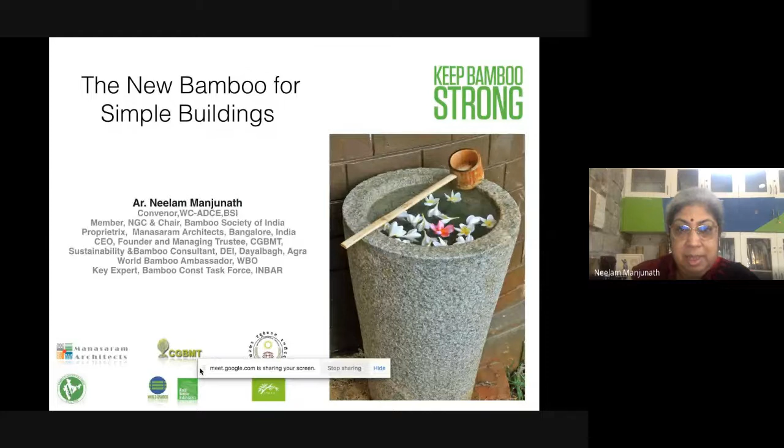This is the new bamboo I'm writing, because we are not doing anything new in bamboo, but we actually should have been calling it the renewed bamboo for that matter. And simple buildings—I think I will come to why I'm calling it a simple building actually.

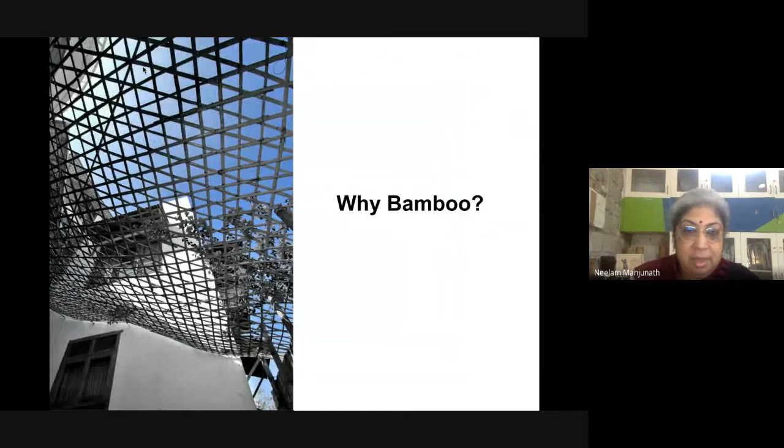There are some issues—this is actually part of a survey which I will also share later, which we did in 2018-19, a global survey on this problem as to why it is not getting mainstream. And I had presented a paper on the same thing in 2015 at the World Bamboo Congress in South Korea, in Damyang.

So what we found was that everyone talks about bamboo being one of the eco-friendly materials, that's why we should be using it, and that's why we are doing all the research. And the researchers also have done a lot of research—actually it has happened. But when it comes to actual applications in the field, there's a lot of gap between what is all the research that has been done and the practical applications and testing of it in the field. That is also a big gap.

That is one thing. For me, bamboo presented a case because one-fifth of the world population lives in bamboo houses even today, even without much intervention reaching the sector. And about approximately one-third of the world lives in mud houses. These are two materials which are available almost everywhere—not everywhere, I would say, in the tropics where bamboo is actually found and grows very well.

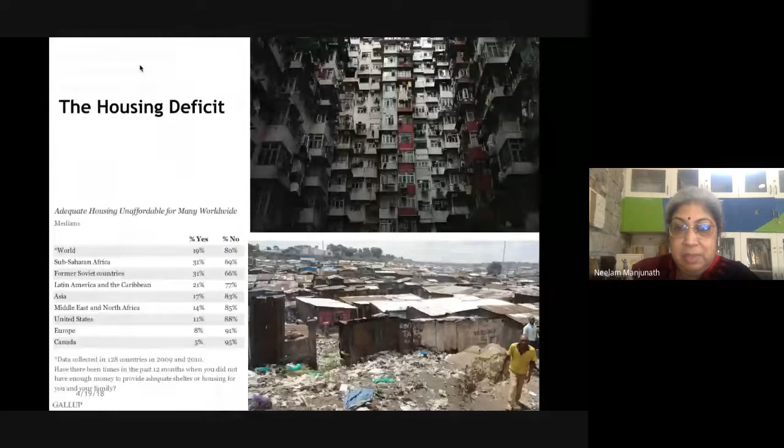That was one. And then, of course, the global warming that we have, because of which in the last 2 years the whole world has literally come to a grinding halt. But the two connections are something which is missed most of the times, and that is why most of the mainstreaming of bamboo, which organizations like CBRI and architects across the world, including me, and many others are trying to do, is not really having a lot of effect.

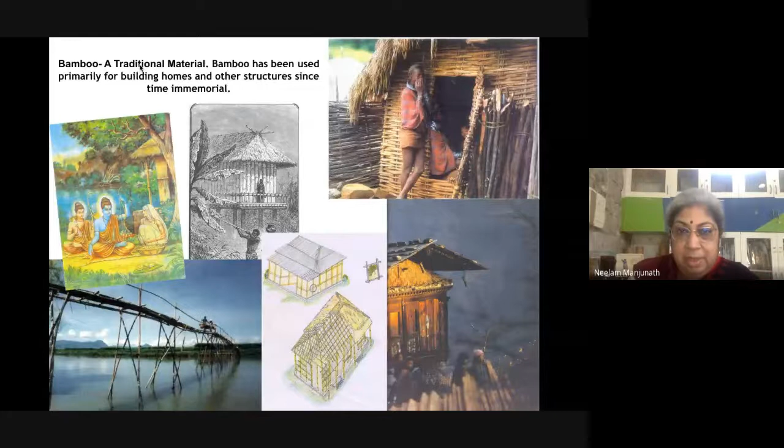For me, also, it was because I do believe that building systems take a lot of time to actually crystallize and also get accepted by people. So bamboo being a traditional material, and at the same time, we also have a lot of people who have been working on bamboo since time immemorial, and they have that in their DNA, in their genes, because they know how to work with bamboo. We really don't need to do too much effort in trying to get the execution people slightly trained or tweaked to do the new kind of systems that we are trying to implement.

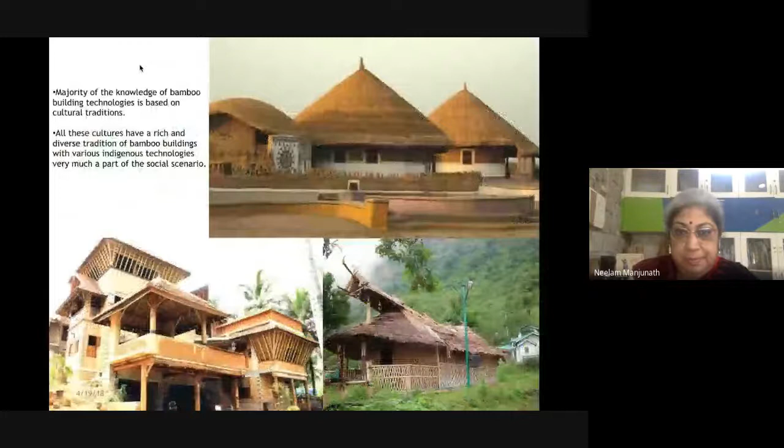I wouldn't say again new, and I wouldn't say new—I would say renewed, or revisited and then improved upon from the traditional systems, which have come down the line from when there was not much communication and transportation, so people had local materials to work with, so they bettered it in the best way possible to work with it and live comfortably at the same time.

These systems we see are absolutely like natural materials. You can't have one system developed somewhere and say that one solution fits all. The global warming issue is partly because we think just like steel and concrete, which are manufactured in one factory and then behave the same way across the world. Even when completely processed in a factory, concrete, cement, and steel can behave very differently depending on climate conditions.

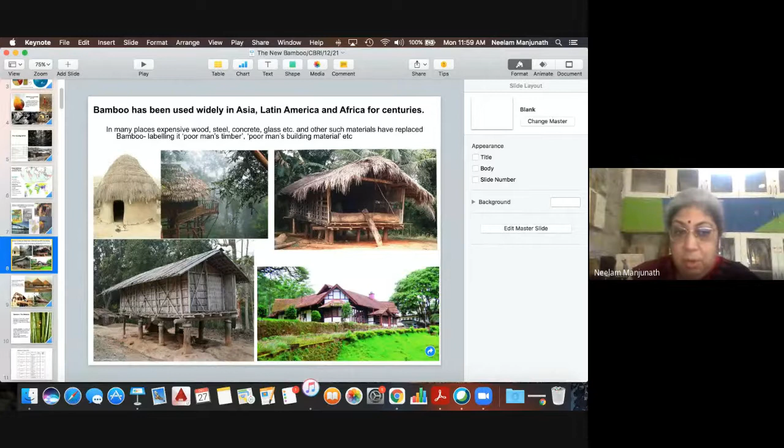So when we talk about natural building materials, it's even more important to go for localized solutions for different climate zones. That's another factor to keep in mind when working with bamboo, especially during research, since different climatic zones will have different effects on all this. That needs to be taken care of.

In our country, all-bamboo buildings are not common in most parts, even across the world. There are very few places where all-bamboo buildings are built and people live in them - more like the northeast, and some parts of Kerala in our case. But in most places, it's a composite material, combined with other building materials as a palette.

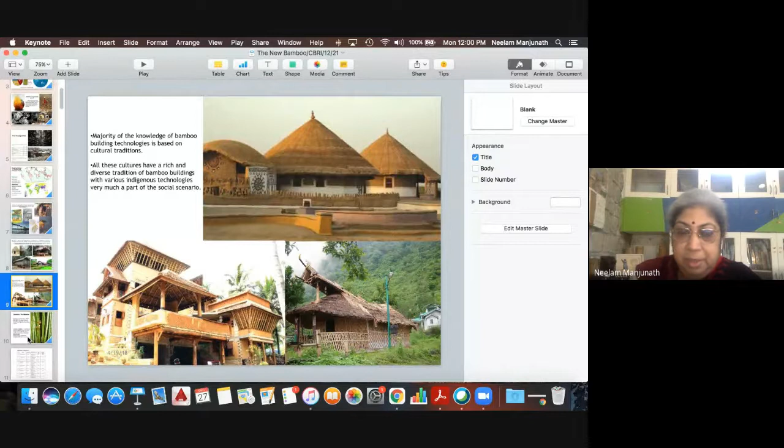The previous presentation was also trying to say that it looks more solid, so people will accept it more because it will last much longer. If it's only bamboo, it won't look very permanent, it won't look pakka, it will look like a kacha house. That's something we need to look at, which is why there's interest in how we're supposed to do research to connect the dots - how the gap between demand and supply needs to be bridged. That's the research question we should also be asking.

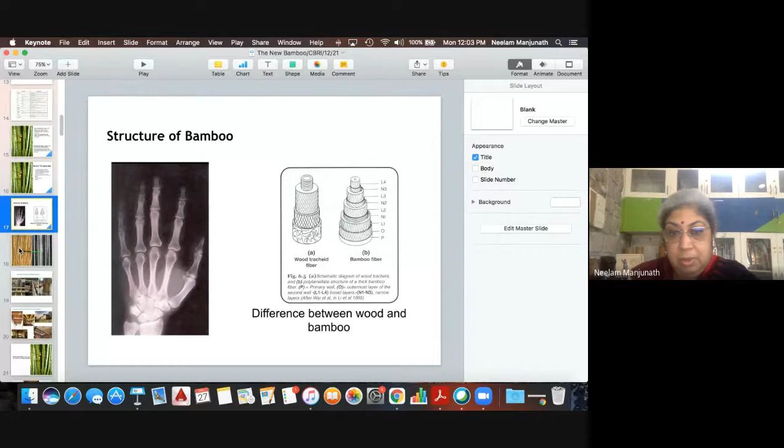And I think you people know better than me that if any natural material can replace steel, it is bamboo. Of course, a lot of research needs to be done, but also a lot of research has already been done, and people have been trying to use this.

These are some recent photographs, but I know people, from Bihar and many other places, where bamboo has been used for almost 60-70 years, used as reinforcement in the slabs.

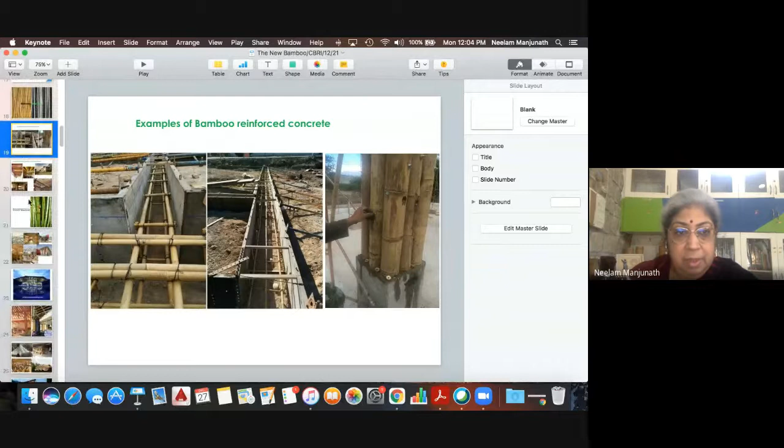50, 60 years is a good enough lifespan, because as we are aware, concrete, depending on the kind of application and the kind of concrete used, has a lifespan of between 40 to 70 years, if I'm not wrong. So if with bamboo reinforcement we can get a life of about 50 to 60 years, I think it's a good enough proposition to use it quite widely.

These are some of the multi-storied buildings done by Didi Contractor in Himachal Pradesh. And this is almost like a 200-year-old building in Bangalore with a limestone slab on it, and this bamboo has not been changed in all these years.

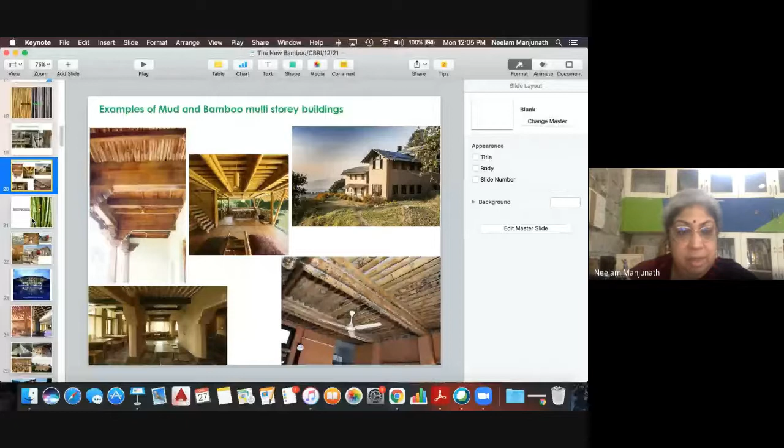As you can see, it's quite difficult to change. This house is actually in working condition, and we have a lot of film shootings which happen here.

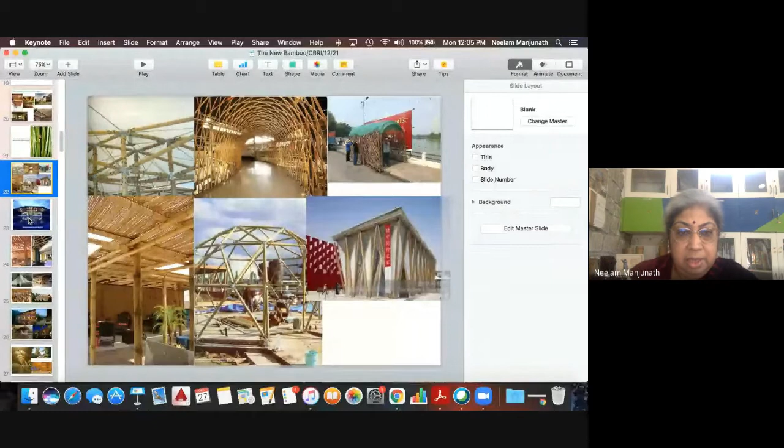I'll quickly run through different kinds of work happening across the world, in different kinds of structural systems. Depending on, I would rather emphasize, because of the platform we're speaking on, we are looking at the engineering aspect of bamboo as to how to really diversify and have bamboo perform.

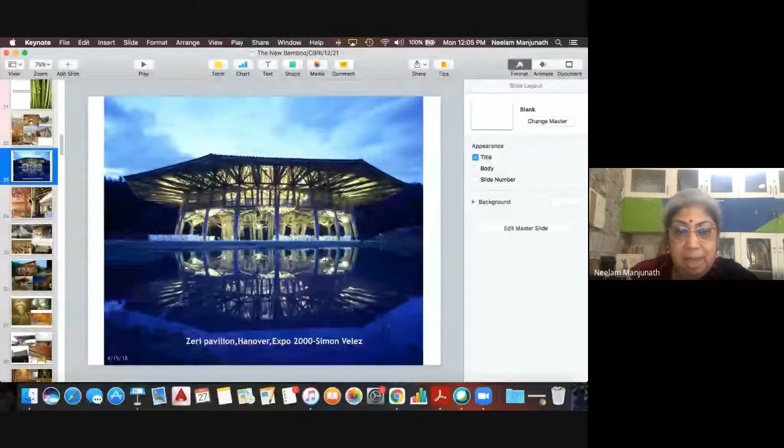Buildings for different applications, not just for some niche market, because that is not going to solve the problem. As we are talking about, bamboo, a grass, can save the world - you would have heard about the TED talk. The grass can save the world only when we use it appropriately, and not otherwise.

I'm really sorry to speak this way, but there is this kind of Bali syndrome, and I'm really quite allergic to it, actually. There is something about using it for fashion, using it for those kinds of things, and that gives people a different kind of impression - it's very nice to do one building like that.

But I don't know how many people - and I have spoken to several people, and I'm trying to put this in front of everybody - this is an excellent building, the Arc, which has been recently completed in Bali, in the Green School. But I don't know how many people actually know the cost of that building.

This is something between 20,000 to 25,000 rupees a square feet. And I would really like to ask this question, whether it is really justified if we are trying to promote it. Because in the media, you don't see the small ones, like what CBRI Roorkee scientist Akash was trying to show. These things don't go in the media because they don't find it very appealing or something like that.

But I don't know how to really go about that, but I think that really needs - you have to call a spade a spade. Yes, you do that kind of building, but you don't say, when you're doing that building, that this kind of building will save the world. They definitely will not.

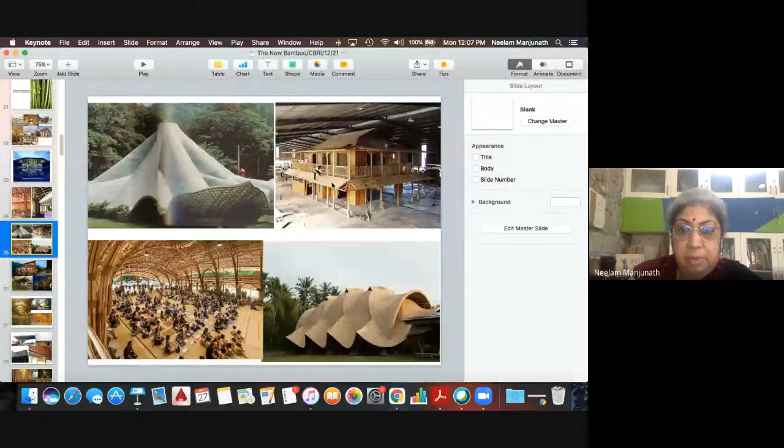They have been doing prefabricated building for more than 20, 25, 30 years, and very good practical buildings they have been building across. And then, of course, this is our Bangalore International Airport Terminal 2. These people, SOM New York, are the architects of the project.

In 2017, they came to us and for about 2-3 months we exchanged information because they had to convince the client. They didn't tell me it was for an airport - they told me it was a transportation hub they were trying to do, and for that they needed information.

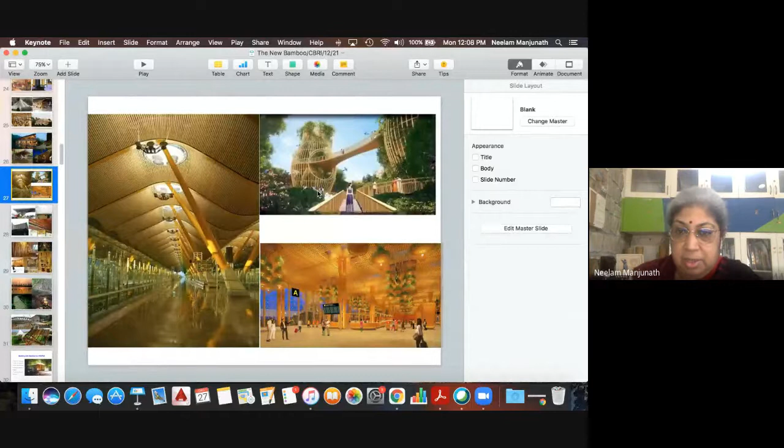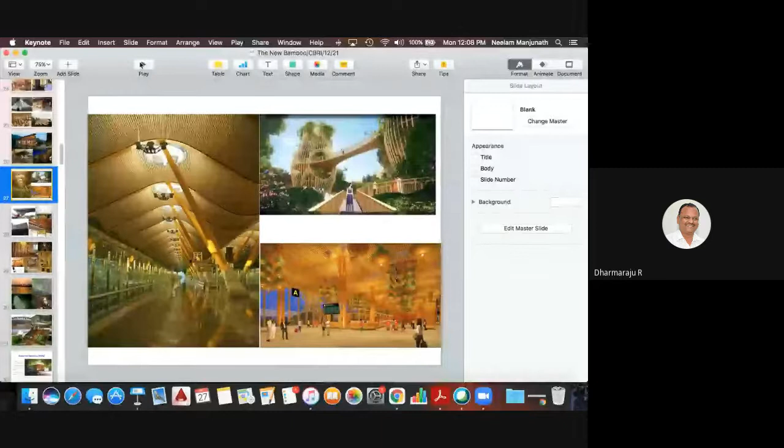So once we were done with everything and they got all the data, after that we never heard from them for a long time.

The next time I met them was in Beijing for the BARC conference in June 2018. They said they were the Dasso company, and that they were doing a project in Bangalore. I said, okay, which one? They said the airport is being done by us. I asked who the architect was, and they said SOM. So these people had never gotten back to me.

After we give you the knowledge, you do these things, and after that you never get back to us. What has happened is all these things have been outsourced outside the country. So inside the country, none of the structural engineers, architects, or suppliers of bamboo actually benefited from this huge construction happening in our country.

On the left side, that's Richard Rogers - he has done an airport in Madrid where this was used. And the second airport in the world is now using bamboo too.

There's a disturbance. Yeah.

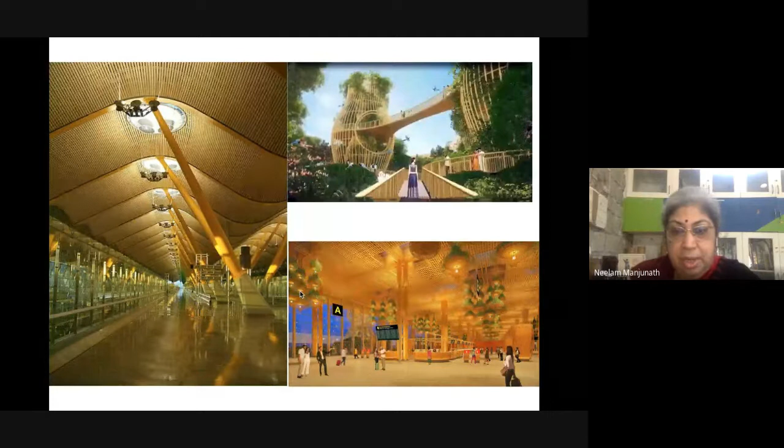But we from India - all the structural engineers, all the organizations, all the institutions - don't get to participate in it, and that's really not very fair.

These are some of the other applications we see in bamboo here. I think this bamboo roofing sheet is one of the best examples of how good we are at doing research, and we can produce products which are really very good. But other than one company, which is also struggling with a lot of difficulty,

Just a moment. Tell them to stop.

They are struggling with a lot of difficulty, and they are not even able to supply. I have not gotten a supply of these roofing sheets, which I've been trying to promote for several years, almost the last 10 years. So that, I think, is a difficult thing going forward.

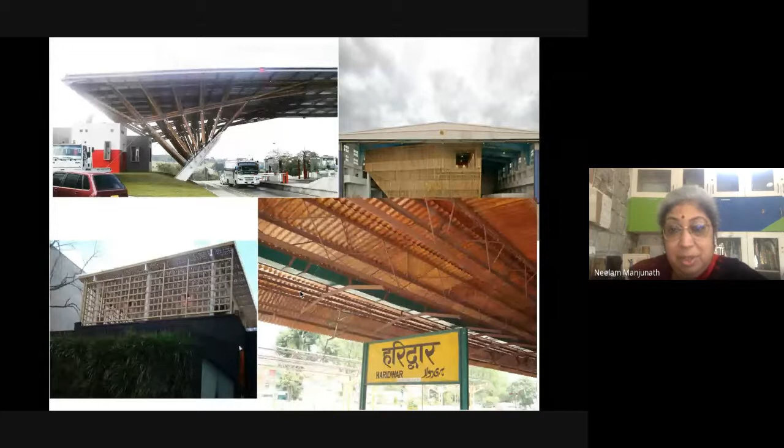These are some interior products which we use. Also the bridge - we know bamboo can be used for bridges, and we really need to take this to the fullest to see it applied properly to small bridges. I'm not talking about long, 1 kilometer vehicular bridges done in steel that should be done in bamboo. But where bamboo needs to be used, it can be used, it should be used, and I think it can take a lot of application.

There are some things again with this bridge - you need to cover the bridge. You can't have an open bridge when you have to have permanent bridges. I will come to that much later.

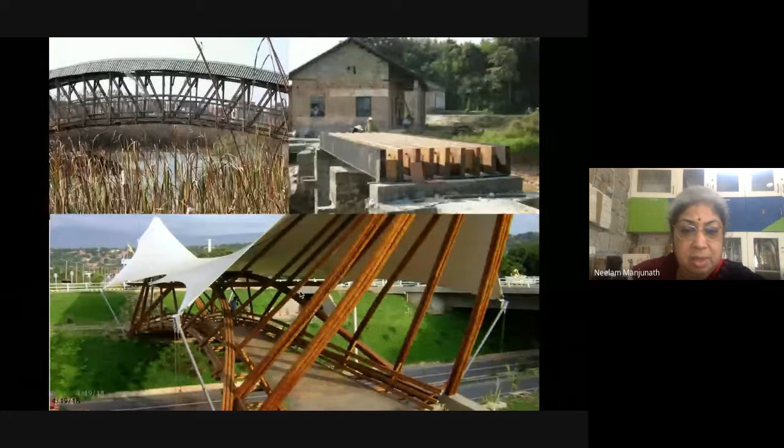These are some of the bridges. The right one is from China. The left top one is by us, and the bottom one is by Jörg Stamm, I think, and our architect Simon Velez - this is in South America. I think we really need to use that.

With this, I'll come to some of our works which we have been trying to do for all these years. What I feel, as I said earlier, is I like to build with bamboo for people, and that has been my aim so far.

If you say 1/5 of the world lives in bamboo houses, and we are able to infuse some kind of technological and scientific input to make that life better - can you imagine 1/5 of the world's population's housing becoming better if they are working with bamboo? What kind of problem would we have solved? This might be a ballpark figure, but between 1/3 mud housing and 1/5 bamboo housing, I think it's a good approximation.

If we can really get inroads through our technology and persuasion for people to use bamboo for their building... As the previous presenter was speaking, I also feel that all-bamboo buildings are not actually the solution to take building forward for people, because it's difficult for them to maintain. There are lots of problems in that. So only in areas where all-bamboo buildings were done traditionally and it suits the climate, we should be doing that. Otherwise, we should go for more aesthetically simple buildings built for people for daily usage and various purposes.

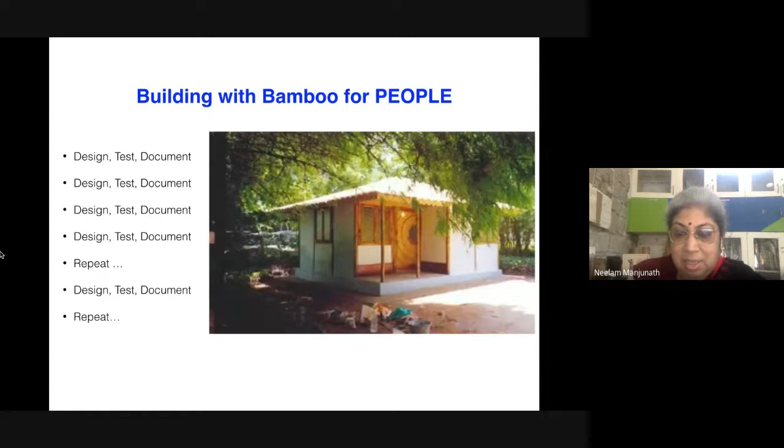My period, I'll take it into just a five year period. We started this journey with the Raj Bhavan. I've already shown these earlier so I won't waste much time on it, but this was the beginning for me of learning bamboo. We were on site for 24 days, literally experimenting, and really excited.

We had a structural engineer with his masters in structure from IIT, and we had a lot of good time with different kinds of systems in bamboo construction. This was like a lab, we really worked, and we were given quite a free hand to work on it. This went on to the second one, and this house is still there in IPIRTI, being used as a club, and anyone can visit it.

Here we did one more, and every step I tried to move forward was trying to put a new structural system in place. Of course I was looking at aesthetics and the architectural part, because that's what gets acceptability for the house. At the same time, I was also trying to evolve the structural systems at IPIRTI Plywood Institute, which is my alma mater for working with bamboo. We had Arun Kumar Bansalji, who was the director, he's retired now, and I have a lot of respect and gratitude to him for introducing me to this.

This was a pyramidal roof with two bamboos with a flange, a distance between the two, that's how I used it. There was no in-between support, I just knocked the support down, and instead of single bamboo, I used double bamboo. It's more like a bamboo truss, the beam that was there, and that's how we did it. It was tested by Dr. Jagdish out there, and this is still standing quite well, with a traditional construction system of Karnataka houses, which has a clerestory in each house.

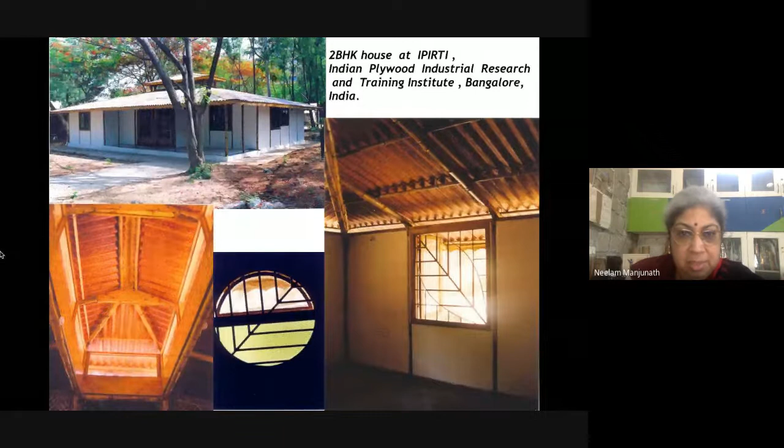So it was like combining traditional architecture and traditional materials, while still evolving the structural system at the same time. That is how most of my projects went, I kept raising the bar for myself.

This was a prefab house we did in 2004 in Bangalore, and then it was shipped to Italy. We did not go there because the project cost was so small that the client could not afford to pay for our ticket and stay. But we made it literally like an IKEA house, and the client was very happy. We still visit him and keep in touch, and it has been working very well out there.

We also try to use it knowing that bamboo grows more in disaster-prone areas, and more disasters happen in tropical and subtropical parts of the world where bamboo is actually known to people. So this was one solution we gave to Seeds India for the tsunami that happened, the Great Tsunami, in December 2004.

The high point again was that we did not want to build it for people. We actually wanted to teach them how to build, so that there's a livelihood option created for them, to take it forward. This was done by them, except we went at least 2 to 3 times, and we had an engineer from Seeds India.

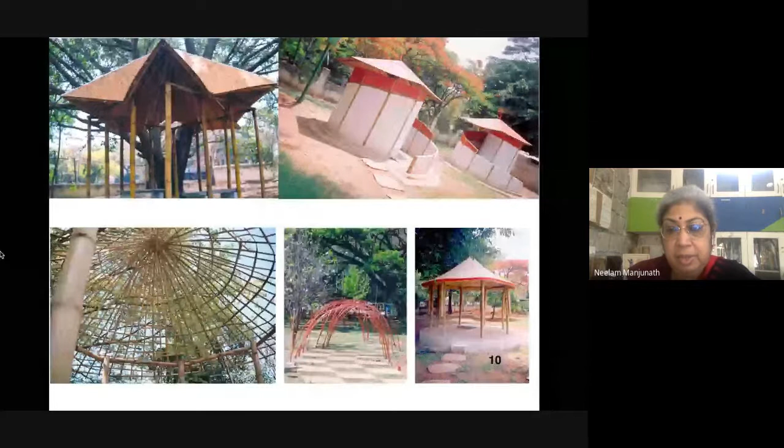This, if you see the bottom right, was my first experiment with bamboo reinforced concrete, or I should say bamboo fiber concrete. That was my first experiment, which I did in 2005. Unfortunately, after 10 years it did not work well, and they took all these structures out for, according to them, something more permanent.

This is around the time the World Bamboo Congress was held in Delhi in 2004, and the Delhi Development Authority invited us to do this project where we did a bridge. It's still there, slightly tilted, but still 80% of the bamboo remains proper.

They invited us again just before COVID happened, and we had an inspection after that, but then COVID happened, so we could not take it up.

And we are hoping that we will be able to either repair the bridge or redo the bridge. So it's been about 15 years now, and they hardly had any maintenance done.

The one point I want to make here in this photograph is that you have to cover the bamboo bridge. Bamboo needs a boot, because it's hygroscopic. It also needs a hat, so that it is covered from the elements, and that will really enhance the durability of bamboo manyfold.

So we don't need to try to say even steel, if you don't cover it, it cannot actually be protected with paint and other things. Even steel, if you leave it outside, in 7 months it will start corroding. So you don't need to be brave and expose your bamboo completely. It will not work. You'll have yearly maintenance and lots of problems that come with bamboo, and that should not be encouraged in the name of fashion or show.

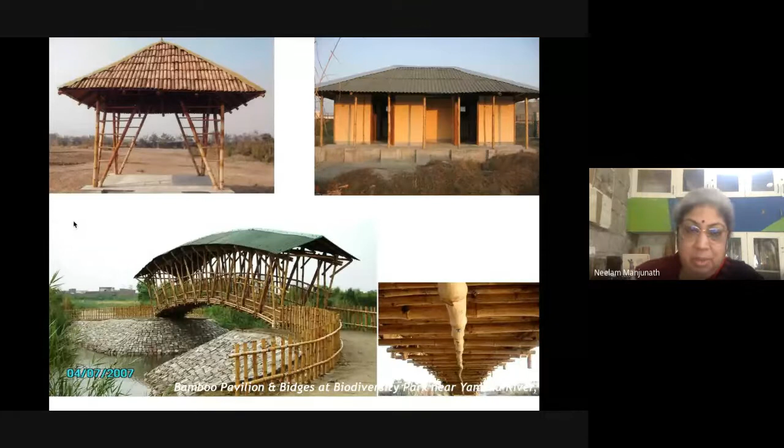This was something done without any nails. We have done the roof, and there was a different kind of treatment system. We actually boiled these tiles in creosote oil to make it completely weatherproof. They are even now, though battered, in quite a good condition considering 15 years of non-maintenance.

It is quite good. Around that time, I also started working on shells, which I'm really fascinated by, because bamboo being a very light material can really be used because of the weaving. When we weave bamboo into a basket or something similar, it can really take a lot of load once it's been woven into a particular form. With that principle in mind, I started putting it into my buildings, starting from small scale.

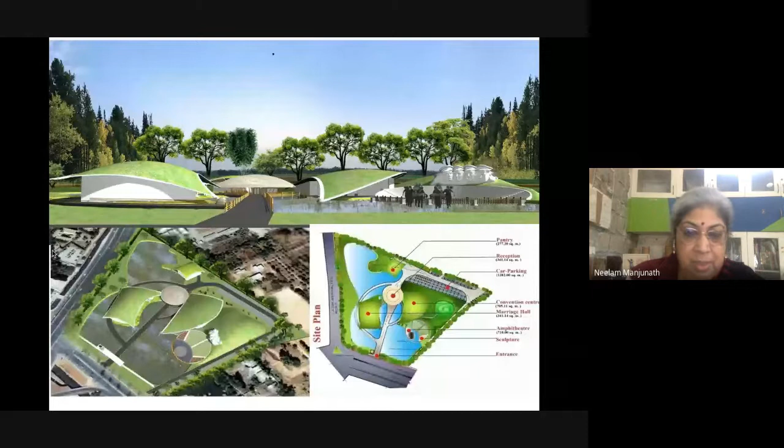If you see, we have even bigger conference halls in that design, and community halls that I've done much bigger with a green roof design. This is very much workable, and we would like to work with research organizations and people to really take these kinds of designs forward.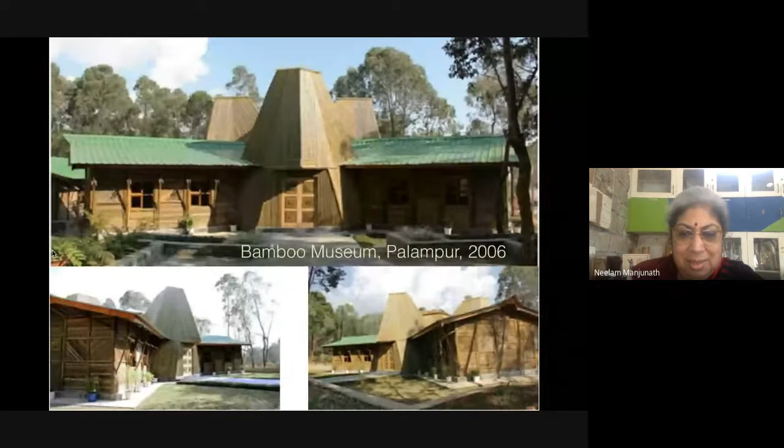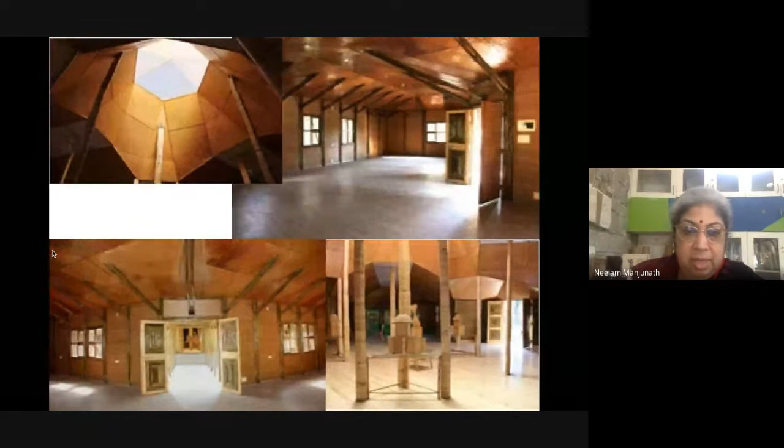This is in Palampur, very close to CBRI Roorkee, done in 2006, and still going very well. These are the interiors, a combination of round bamboo and also processed bamboo, like bamboo sheets and BMB boards. I think it works very well. This is a museum and very much in use at the moment.

In 2008, I started my own house, where I started thinking about combining bamboo with mud instead of cement. When I was doing the cement plastering to bamboo-crete walls in my projects, I started thinking about mudcrete to be done with the bamboo walls. So this was one project, since this was my own house.

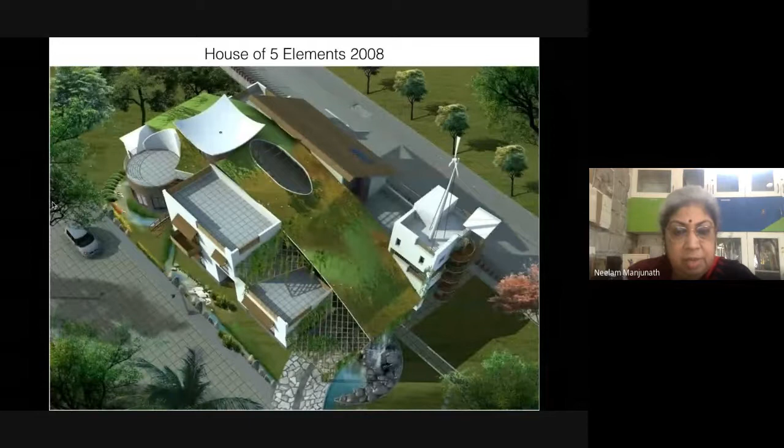Even with mud, I did a lot of experiments, almost 30-40 experiments, testing and working with different scientists and engineers to really work this over. The high point of this was the roof we've done, that 4,000 square foot roof you see there, a 175-feet-long curved beam with three round bamboos that we put there, and a very steep slope.

If you see the slope here, we had to employ a different kind of viscosity of the concrete we were using, and we had several meetings with the RMC company, who cooperated very well. We had a very good time doing this project with them.

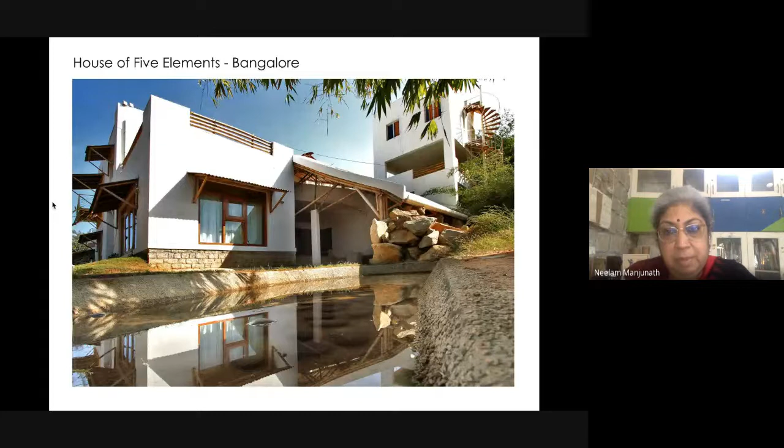All this is mud. Mud and bamboo, these are two materials. When you tell people you'll make their house with mud and bamboo, they immediately think about a shack. I wanted to change that thinking, that mud and bamboo needs to look like a shack. So this is the house I have done, almost 5,000 square feet footprint, including the basement from where I took the mud out and stabilized mud blocks with bamboo.

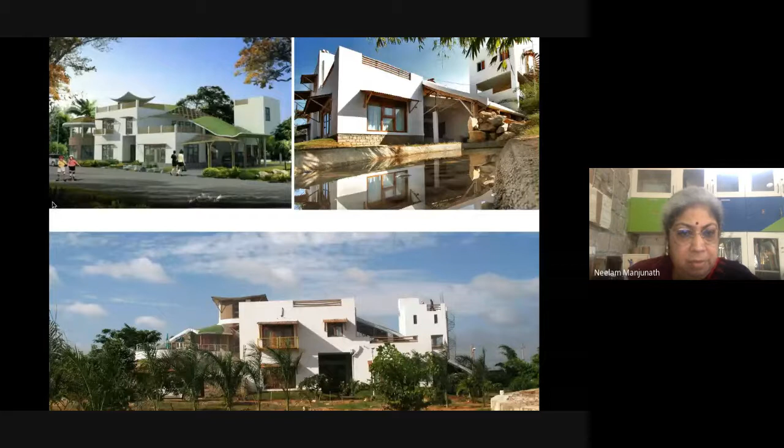Even the bamboo-crete walls have stabilized mud plaster instead of cement plaster in this case, and that's what we used. Here are different photographs of the house. Even for smaller things like the pergola, I have used this material, bamboo. Even the roof at the top of the staircase is also bamboo-crete. And small things like small bridges, you can see here in the photograph on the right - there's a very flimsy bridge you can see.

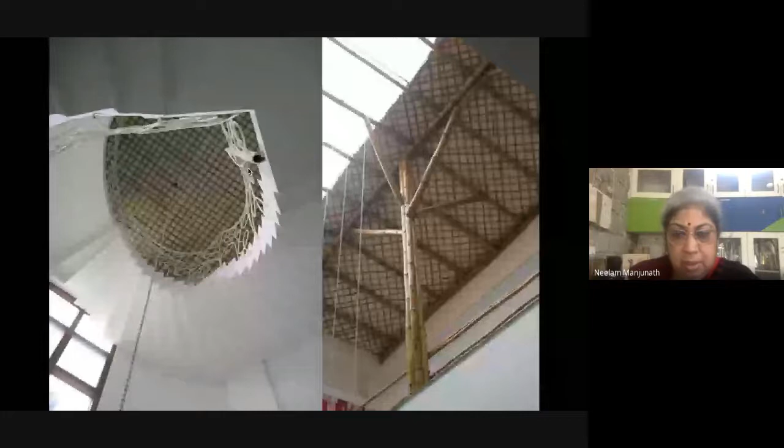A very slender column takes the load of that curved roof I talked about, and you can see a very slender beam as well - a very simple system of taking all the load of the structure down. If you see the edge of the roof on the wall, it is not actually on the wall. We have one bamboo that runs through, and the whole roof sits on that, not on the 9-inch mud block wall.

So this whole thing is taken by these slender bamboo columns, almost 18 feet tall, flooring, different kinds of systems used. And here you see that column with asymmetric loading, a 20 foot tall column, which transfers the whole load to one single bamboo taking it down to the earth. That is something I am also surprised at how it is doing it, and I would be really happy to see these things tested by research organizations to take this forward.

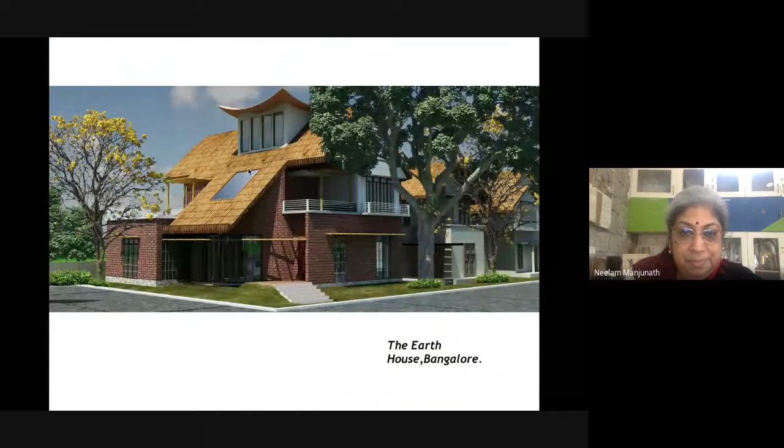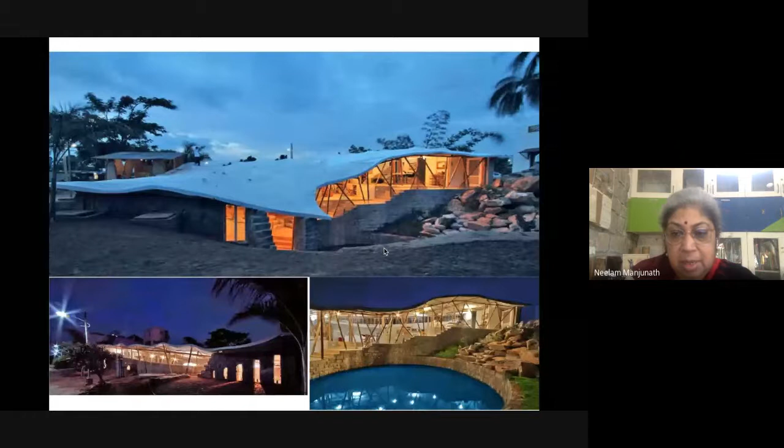This is the structural system in a fishing platform, where you have very slender single bamboos. We take a lot of load, so much fish has to be taken out from the sea and other things. Here it is almost like a 5-inch slab, and you have only one single bamboo, which you see on the right side and the bottom - a curved beam with joints, resting on these very slender leg-like columns. That's all the structure it has.

If you see the inside, this is the way it is, and it's got quite large spans of space. I have almost 15 feet clear spans, which generally you would get from a 9-inch column or something like that, as you can see here. This is the way the roof was done - it has bamboo split as reinforcement inside.

I also use bamboo fiber in the concrete itself to make it much lighter, and to reduce cracking by improving the bonding. This is not mudcrete, this is a proper concrete we have made, supposed to be around 2.5 inches, but somehow with plastering it has gone to almost 4.5 inches.

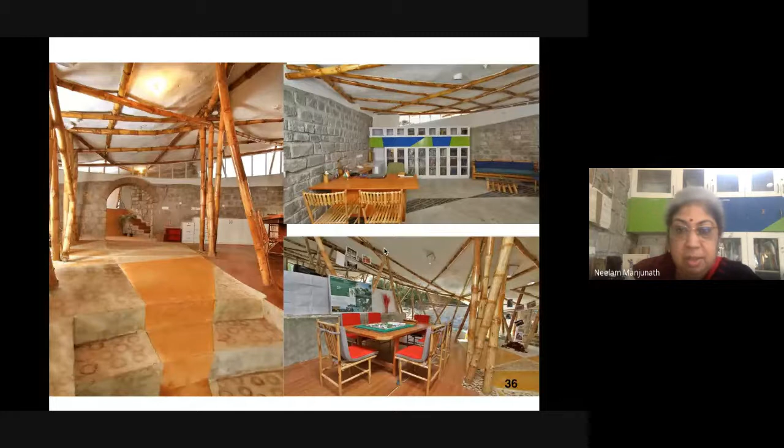All these things now, it's almost 10 to 11 years, and it's been working fine. Further, I moved to even bigger, bolder work than what I had been doing so far, and on site work that I could do. I really got very bold, and I proposed this to BMRCL.

They invited me to put forward a design for a metro station, not the whole metro, but the top structure of the metro station. This is completely a woven bamboo composite that I designed, and the whole structure works by virtue of its shape and the way the elements are connected to each other.

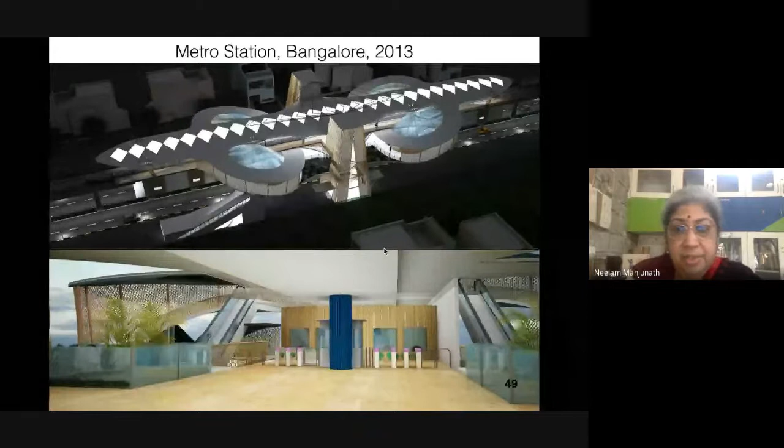The tensile members you see on top are kind of braided steel wire strings that we tried to use for this. There are other two options that we have given, but the government has taken a long time on this. I'm hoping that after the Bangalore airport is done, maybe one of these can finally come live, if not in Bangalore, then anywhere in the country, and we could do a good job with this.

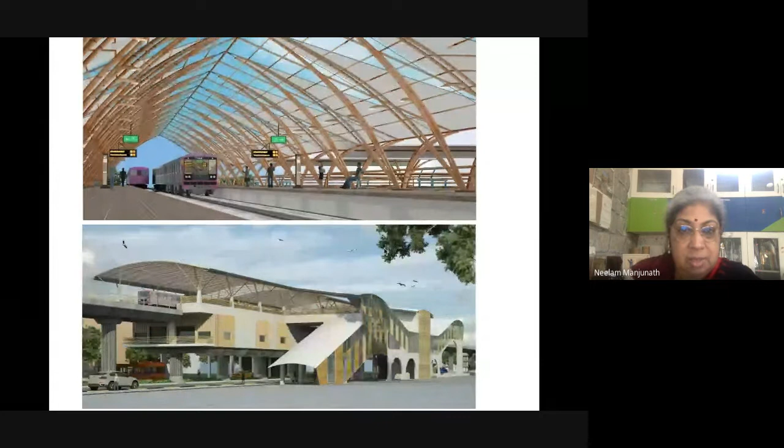I would also like to work with some research organizations on the structural part of it, to take it forward. There are some other projects where we have incorporated bamboo in a very different manner.

This one is in lime concrete, because it's in Hungary, where limestone is used in a lot of traditional buildings. I try to incorporate that with bamboo, always trying to stay local. They use bamboo for musical instruments in various ways, so there are a lot of musical walls that we created. It's not just a structure - it's also an element that takes the load.

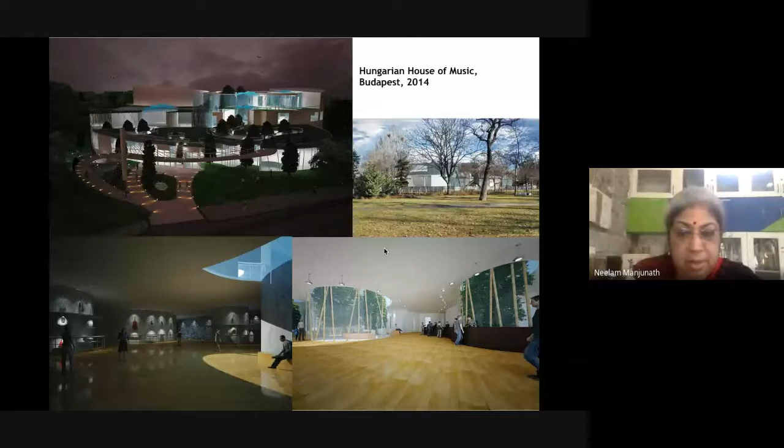It's structural and cultural, and you could say architectural and aesthetic aspects all coming together in one, but still done in a very responsible manner - giving proper support, proper fire protection, proper cover, and respecting how bamboo should actually be used, not trying to be overly brave with things.

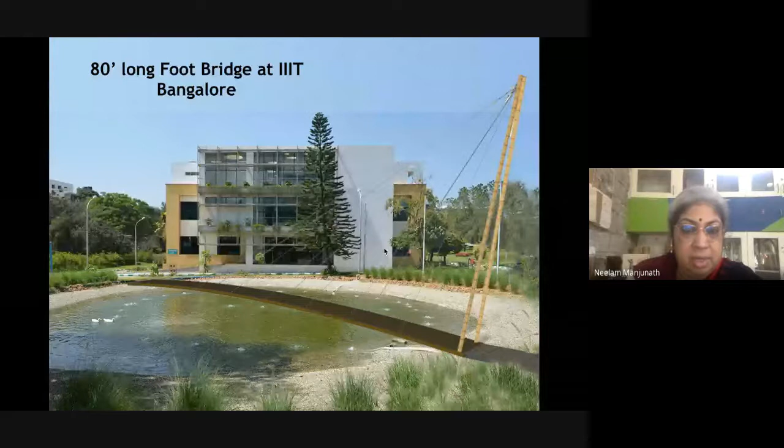This was a temporary bamboo bridge that was requested, but it was never actually done. It was around an 80 foot long bridge for 13 lakhs. I was told that if it was steel, it would have been fine, but for bamboo they felt they couldn't really spend that kind of money, so it did not take place.

Further, we have tried to move on to projects where bamboo becomes part of an overall project, like a housing scheme. Here we have a housing project that is almost 60-70% complete. Some villas are complete, and this apartment is almost complete, to be handed over in another month. Once it's complete, I'll share more pictures later. But the bamboo elements are still to come - they're not visible yet, so I have not put pictures here.

This community center, which you see on the right side, is made of rammed earth and bamboo construction, and we are hoping to start that soon as well.

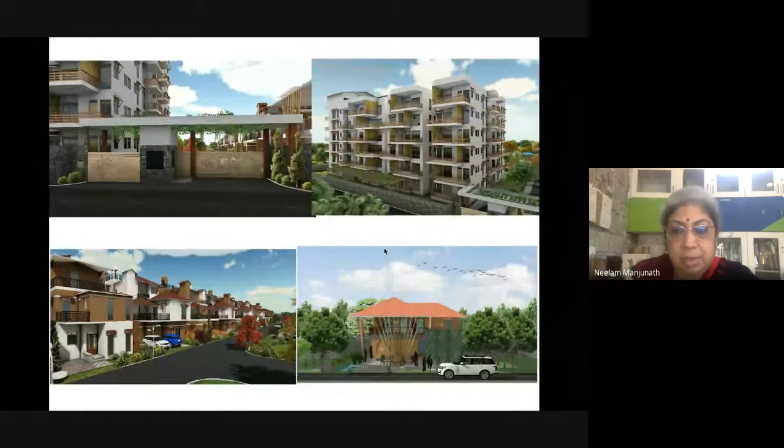There's another large project we got, in Tirupati, Avilala ecological park, which we got through tender - an interpretation center. What you see is a 30,000 square foot structure, a composite structure, because we were not allowed to use cement, concrete, or steel here due to the nature of the project. So we were invited to design for it.

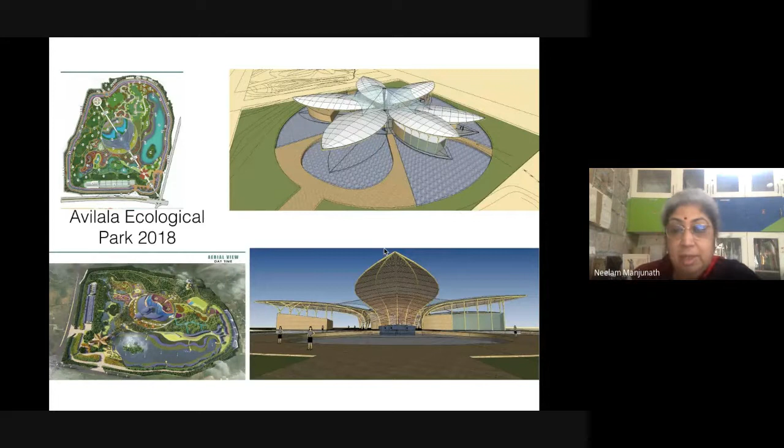As you can see here, we have used tensile braided steel to hold together all these leaves of a shell structure. All these shells are very ambitious work for us - 30,000 square feet, if it gets built. It's still going very slow because the project started and then we were hit first by elections and then COVID for the last 2 years, and it's going extremely slowly. With Chandrababu Naidu no longer in power, I think it has gone into some kind of a slow phase right now.

We are hoping that it will. This also had a 150 feet tall watchtower, and also a skywalk which was around 1.7 kilometers. So these two, if it would have been built, would have been the highest and the longest in the world.

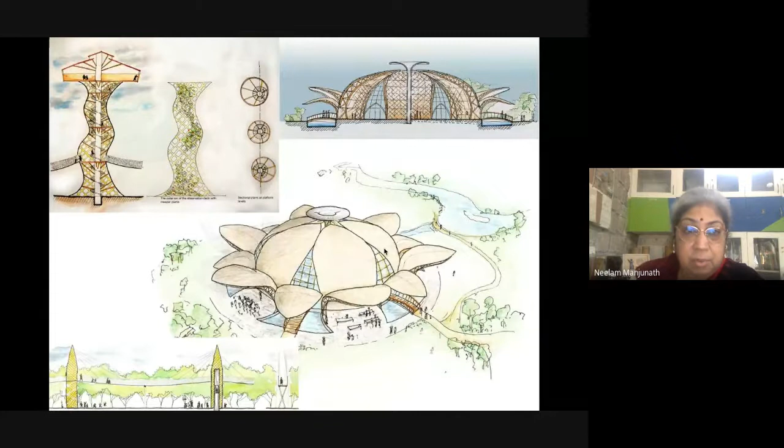If it is constructed. We also participated in an international competition, and this is actually a live project in Bangalore for slum development. The authorities are giving slum people almost pigeonhole 250, 300 square feet apartments on the 13th, 14th floor, which people don't find comfortable, because the way they live is very different. So they really feel very uncomfortable about this.

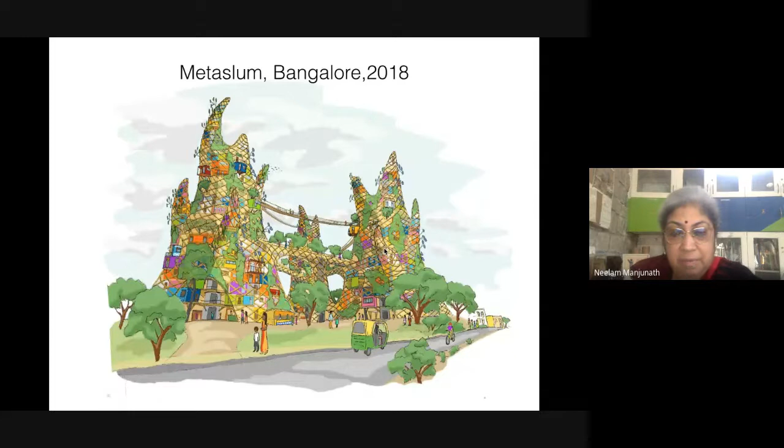So this was one solution we tried to give: you have an inside core with concrete and steel, with a lift and staircase and all that. And then the other parts, like the external floor beams and things like that, can be done with materials these people are more familiar with back in their villages or urban areas.

This can be a small unit, just like we do the Ashraya house. We give the basic house, and then people build on it as the family grows, as per their financial means. Today he might only afford 250 square feet, but as he grows he may afford more, and can extend his house. So giving that kind of incremental housing in a slum development program was the idea here.

And also with this, we have tried to give a bamboo skin, which is like a mesh, and these can be replaced. This is also for a safety measure, so the building has complete safety from all sides, and inside that all this development can actually happen.

But this net was also supposed to have areas where you grow plants, like in villages you put a bamboo pergola and grow vegetables. There could be just one or two plants of gourd or something that runs through the whole season for vegetables for them. That was something we wanted to do.

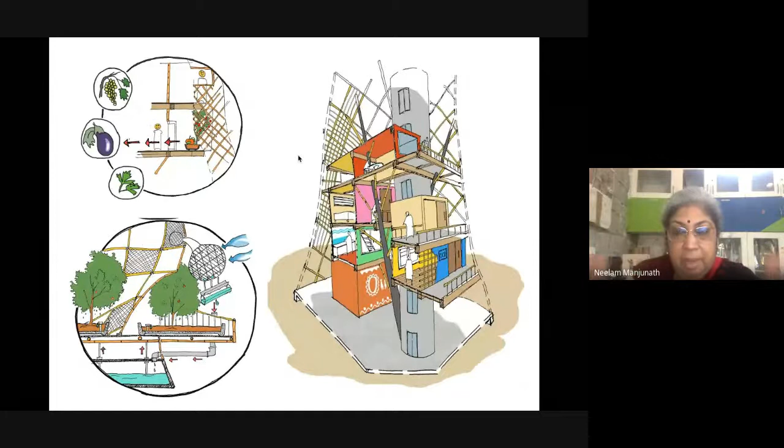Bamboo is not just alone, like sticking out as bamboo and trying to carve and say, 'I am bamboo, I am a bamboo building.' Instead, we try to incorporate it into different kinds of systems.

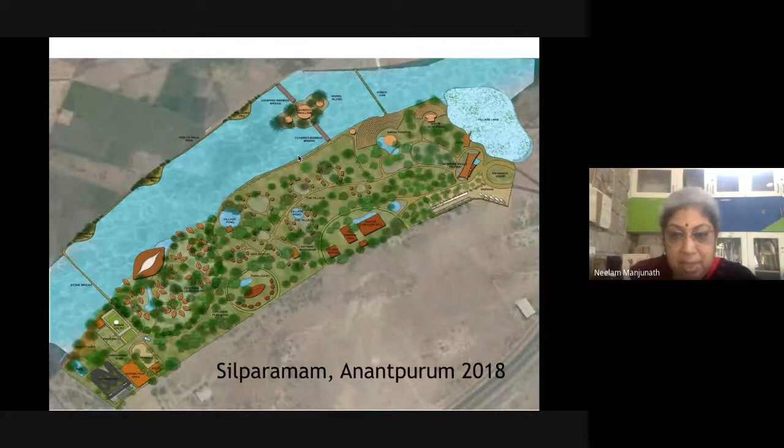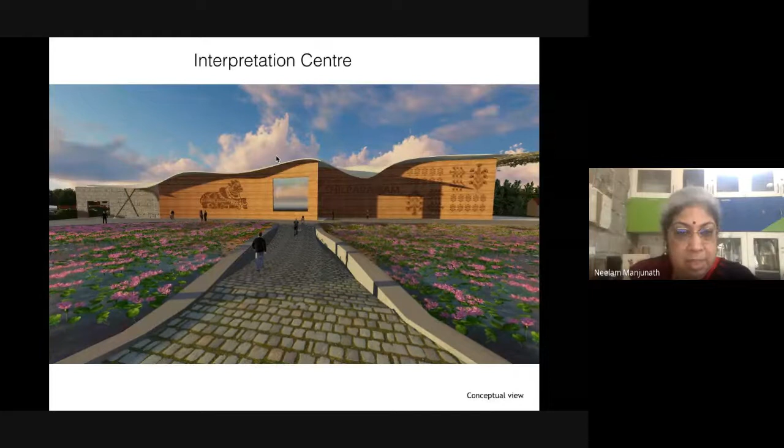This was another big project that we got through a tender, and it is again going very slow after the elections. But this is also a very ambitious project for us: a 20,000 square foot bamboo mudcrete shell roof on rammed earth construction, and various other such structures we have tried to do, as per the craft systems of the Silparamam.

This is a Silparamam project, so it's not that you put all the handicrafts in itself. The craft of making buildings - people think craft is separate from engineering, but we actually have to incorporate the two and bring them together. That's what we have tried to do in this particular project.

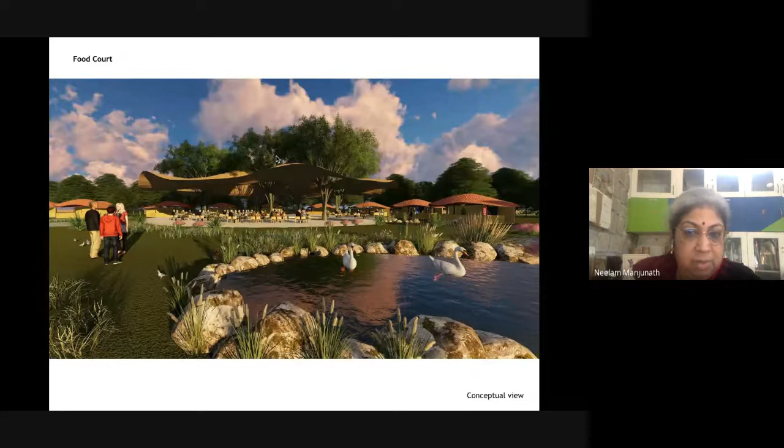We were invited as one of 5 people from across the world to make a pavilion at the World Bamboo Workshop. Our Manasaram Architects were invited, and what we did was again a shell structure we had been doing, but since we had only 7 days, we did a smaller one. Here also we have a 9-meter span on the longer one, and the shorter one is around 6 meters span.

And this was the space to sit, and we were supposed to do a permanent structure in about 7 to 8 days' time. So for the roofing, I've always been thinking of how to do a roofing for a curved roof. And curved roofs always have these challenges - either you have this cement concrete kind of shell.

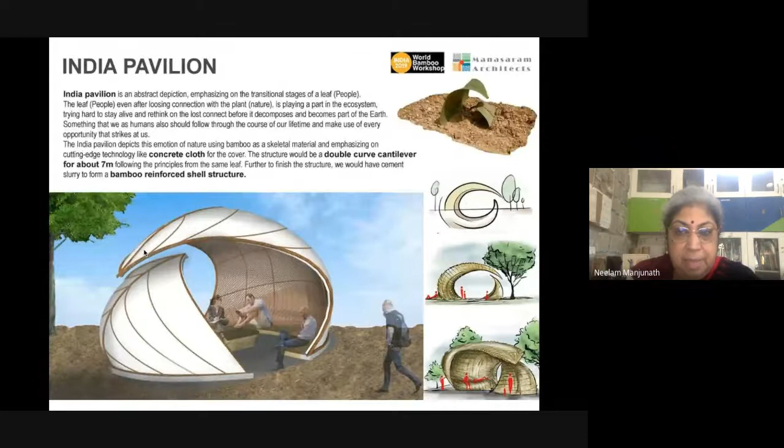So here I started working with concrete cloth, what we call, making this in a local manner. We took jute as a base material, dipped it in a cement slurry, put it over the structure, and did a lime wash for that.

So this was getting into a similar kind of project. It was a retrofit project where we were supposed to do a millet center, millet being associated with rural things. If you see the kind of structure it was, we were told to pull down the whole thing and rebuild and redesign it. But we got a structural evaluation done by a certified person, and we found that it is quite strong.

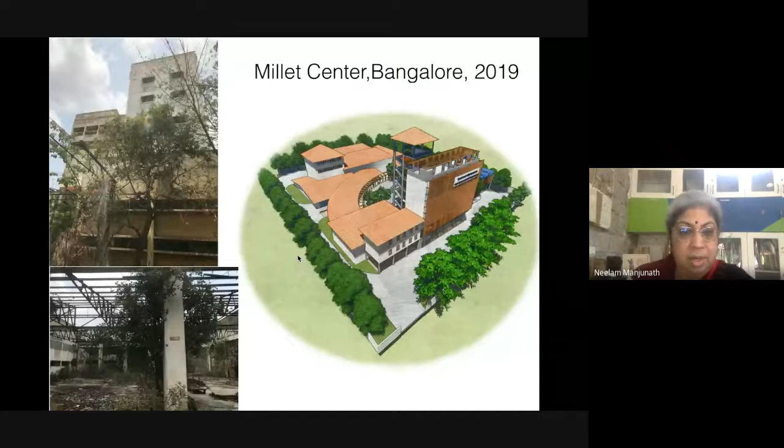The structure is quite strong, so we retrofitted it, and we have this very large bamboo facade that we are doing here. This project has already gone through and also got its funding from the central government. We are hoping to start the project very soon. This is the kind of retrofitting and several other things we were trying to do here.

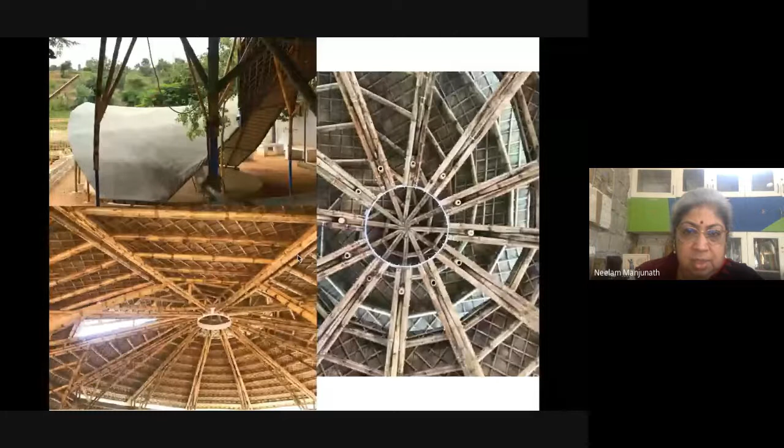And we have also had a circular hall that we did, which is almost about 40 feet diameter, a free span circular hall. This is the structure we did - it's more like a spiral that we have done.

In all of this, we have been on a pedagogical journey. We're trying to tell people - because I understood that unless we have skilling, and not just skilling the people on site, but also skilling right up to the designers, architects, and policymakers - that's what we have been trying to do since 2003. We have been associated with DEI University since that time.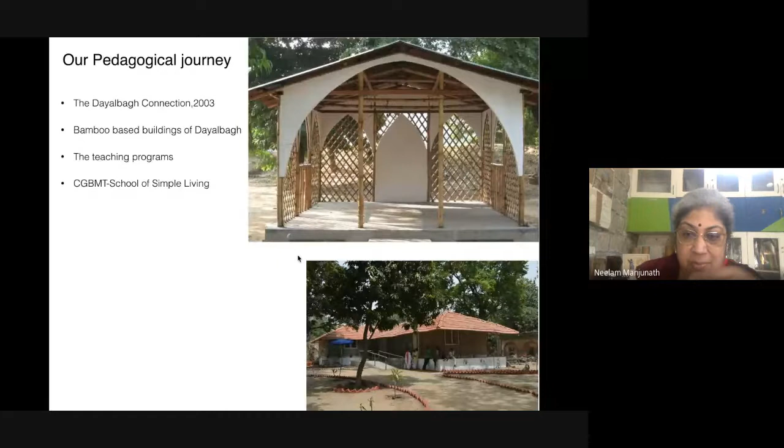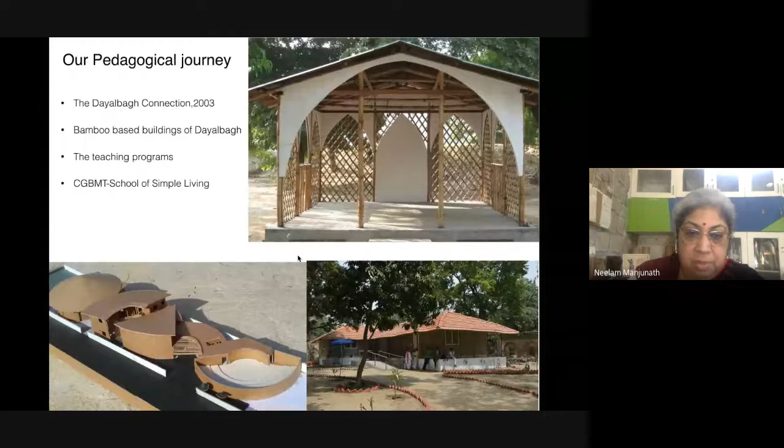The bottom one, on the right side, is the Amritsar guest house, which we did in 19 days flat, with everything intact. On the left side, we have the faculty block for agriculture and bamboo, with a workshop - 16,000 square feet of construction - which is actually lying with the UGC for funding, and we are hoping to start the project very soon.

This was finished in 19 days' time. This is the level of work one can do if you are really properly organized and have all the resources at hand, which DEI provided to us. And you can see it's absolutely finished - there is no compromise in any kind of work that we had to do.

This was a mud flooring done by the ladies of the community. Even the plastering was done by the ladies here in Amritsar.

Excellent kind of work, it was amazing to see them work. The university also asked us to do a creche, which was done collaboratively between the faculty's work department, Mansaram Architects, ours, and the NGO together to train the whole team.

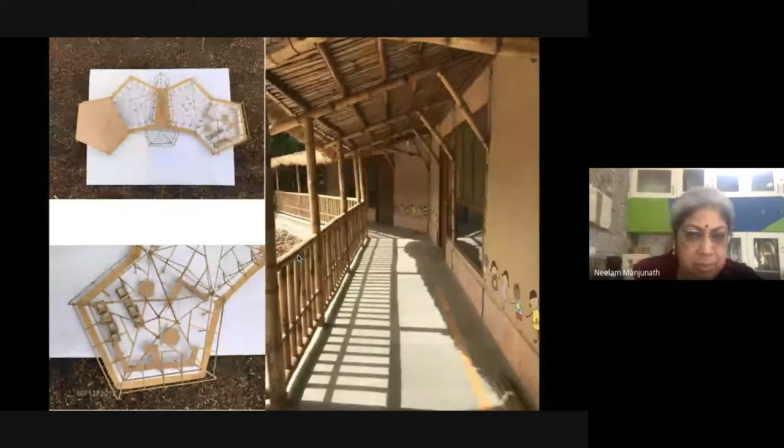Again we used local bamboo, which in Agra is not available in long lengths. So we had to break this pentagon roof into a spiral. These spirals you see are not regular—it's more like a fixed kind of configuration that happens there.

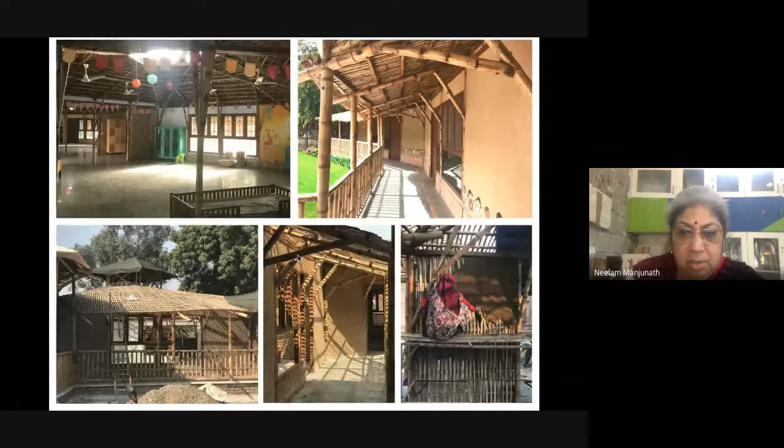Here you can see we incorporated the community ladies for doing the plastering and all that. So this was a project we finished for them.

This is a project currently running—two bamboo conference halls for Dayalbagh University. On the right is a hall we are doing right now. Recently in November we tested this arch, because we always test our structural systems before employing them in the building, for safety and to be completely sure of the issues.

The overall span of the roof is 83 feet across and 110 feet long. On the ground it's around 74 feet by 105 feet, from clear span support inside the hall.

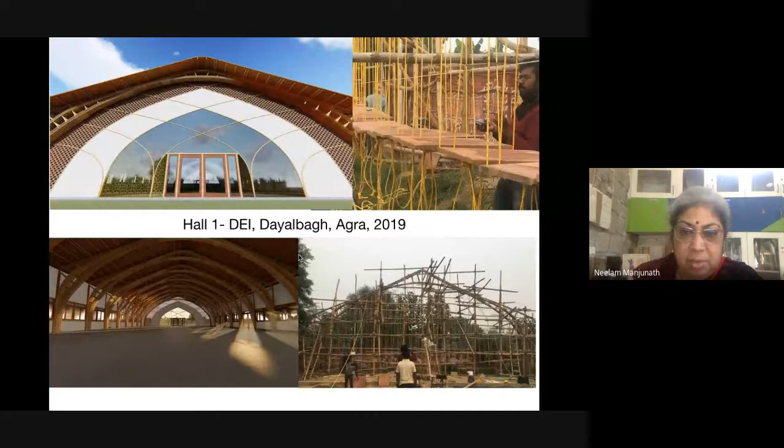You can see the testing we did with our engineer Pawan Kumar, Gurdial, myself, and all these people—Pawan Kumar, Gurdial, the DEI people, and our Gopal did the testing out there. We put these slabs one by one over the other to test, and afterward whatever problem came up, we tried to solve it.

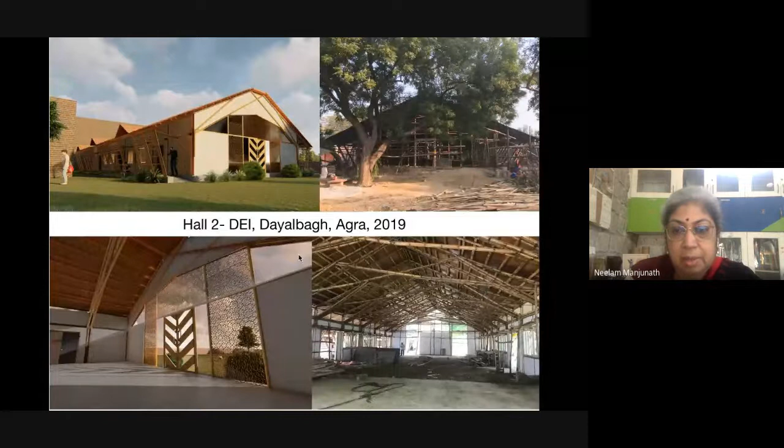This is hall 2, which we have almost finished now. This is another second conference hall, almost in finishing stage—flooring is also over, now the glass is being put in, and we are finishing it up. Maybe by January end we'll be able to hand it over to the university. These are two projects.

My last two projects I'm sharing show what can go wrong when the client or other people don't understand what you mean when trying to do the structure. Execution on site can also be a very tricky affair. You might design the best building and done all the experiments, but if the people in execution don't take it seriously and treat bamboo as a temporary material, things can go really wrong.

This was one design-build workshop we did in Trichy, with Care College Trichy and Aarhus School of Architecture Denmark. We were there for 4 days to design and build. As you can see on the left bottom, we were trying to work out what will actually work practically and develop the typology—using Grasshopper and Rhino to model it in the computer, alongside a physical model, all simultaneously, until we arrived at a structure.

After that I came back because I couldn't stay—it was almost a 40-day workshop in total to complete the project, with students there from Denmark and other places. What they did was reduce the number of supports we had given, and also the bunching of the beam at the bottom, making it half of what we had originally given them.

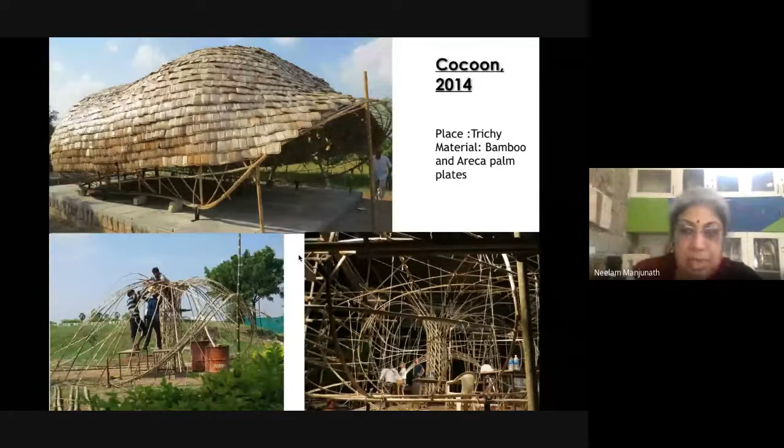This was shortlisted for the Fibra Awards in 2019. I went to Paris and we developed everything. Then we were looking for the photograph of its usage, and that's when I came to know that it is not there. So these things can go wrong.

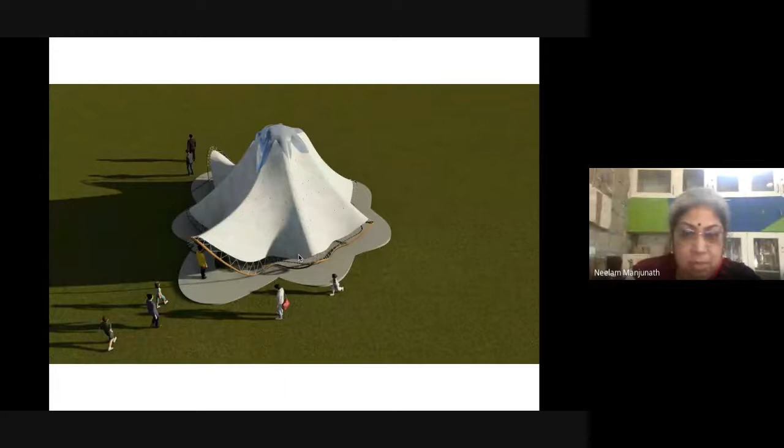This is the last project which I am showing, another one which we have done in Maihar, and it was like 7 shells all put together. We did the whole thing, and everything went very well. It was almost a 45 to 60 day workshop, completely in that mode, incorporating local art and other things that we tried to do.

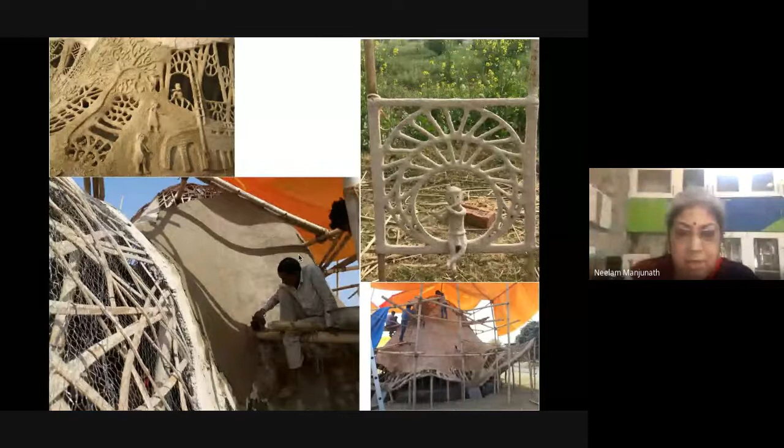We even completed the whole thing, finished it, and removed the scaffolding, and there was some problem. If you can see here, there's a glaring problem of design where the building load is going to the foundation. I told the site supervisor that this needs to be completely covered because that takes the load. The design should be only where the shell actually goes up, and wherever it goes down to the foundation, it should be completely covered and plastered. They didn't do it, they didn't take it seriously, and the structure sat one month after the scaffolding was taken out, because the client never took it seriously enough, and the supervisor was just a person generally supervising this.

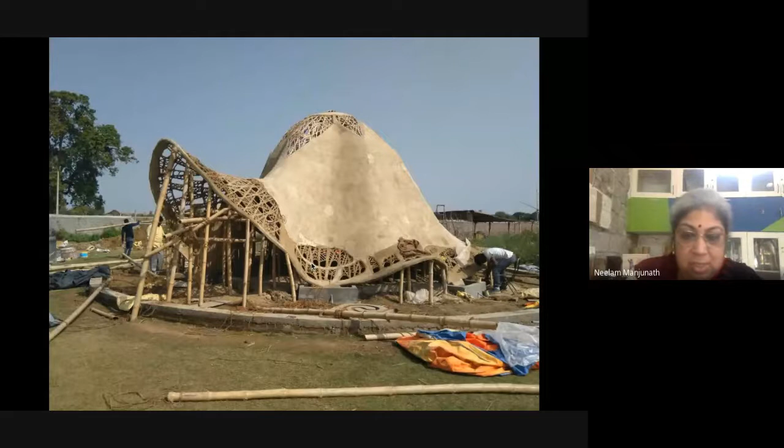This is also actually a sculpture museum which is there in Maihar. It was such a nice structure, but it had to be dismantled last year because the client did not really take it very seriously. And this is something which we really need to ensure.

At the end, I just wanted to quickly share this JVT School of Simple Living. We started in 2020, and we are trying to develop a kind of pedagogy for architecture with bamboo. We also are involving engineering colleges in this and different kinds of organizations. We are in talks with several engineering colleges, because we really want engineering colleges to be involved in all these experiments that we do.

We are in an advanced stage of that. We also have approached the ACCE, Association of Consulting Civil Engineers, and the president, Dr. Ashwath, is also very keen. We called a meeting of approximately 50 people, 50 heads of civil engineering colleges with whom we really wanted to work.

Most architects and designers want to use bamboo, but find themselves handicapped due to several issues like academics, availability, and execution. Very few professionals even now cited the eco-friendly properties of bamboo, because they probably are not aware. Most of those inquired thought that bamboo could be bought at the current price if quality is assured.

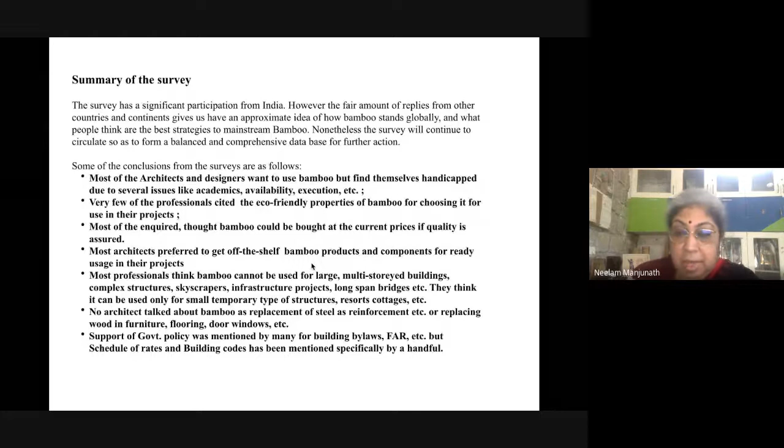No architect talked about bamboo as a replacement for steel, so a lot of work needs to be done in that, for actual on-site applications, taking all the things we have done in the lab to the ground. The support of government policy was mentioned by many, for building bylaws, FAR, etc. Schedule of rates and building codes had been mentioned specifically by only a handful, because probably they never thought that bamboo has a code. Many people actually don't know.

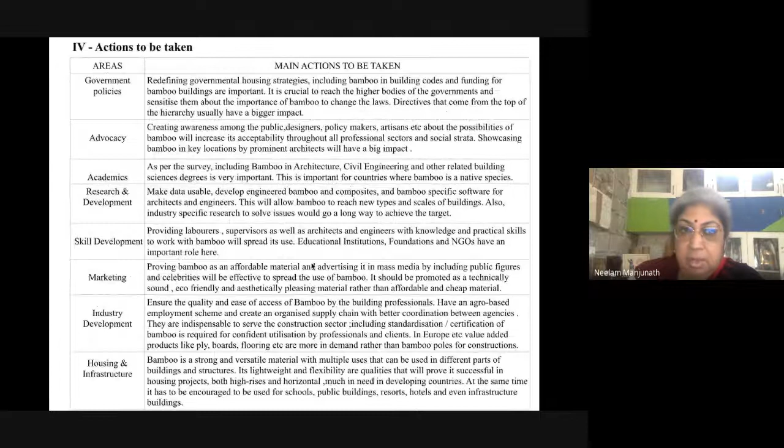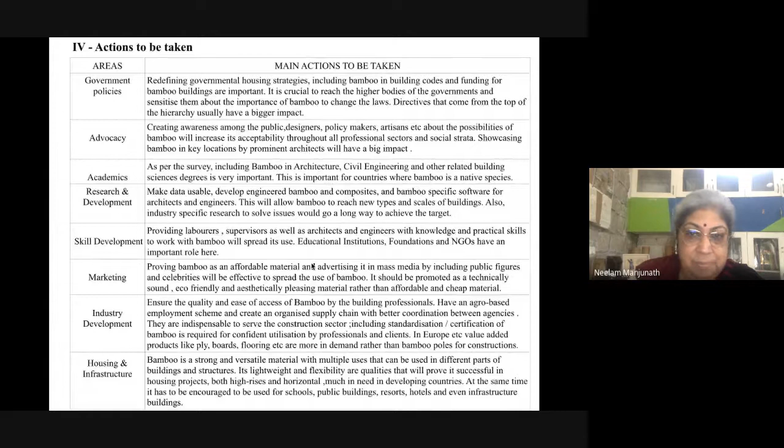These are a lot of actions, I think already spoken about before. But government policies, advocacy, academics, research and development, skill development, marketing, industry development, and housing infrastructure -- I think these are the main actions that need to be taken in several areas, which we are trying to work on with several organizations. And this is a conclusion.